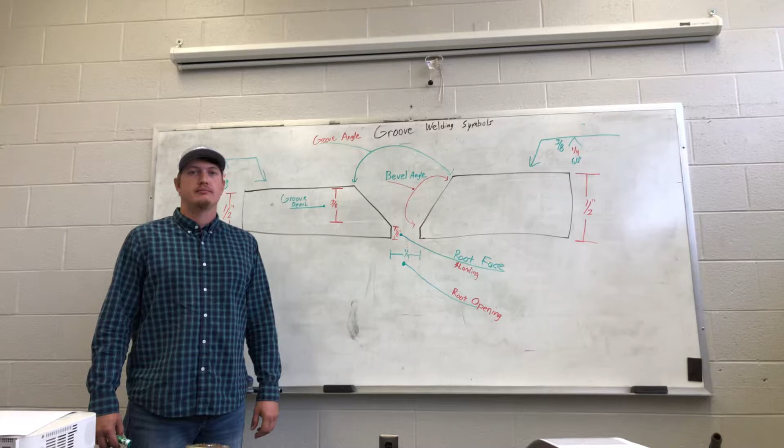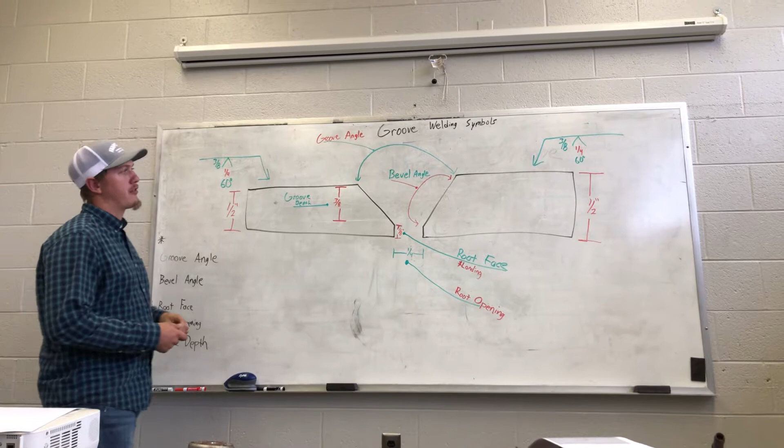What's up, guys? Today we're talking about groove welds and some of the different things we might see on a groove welding symbol. So we're going to jump right in. We've got several different things we want to cover. First off, check out our weld symbol up here.

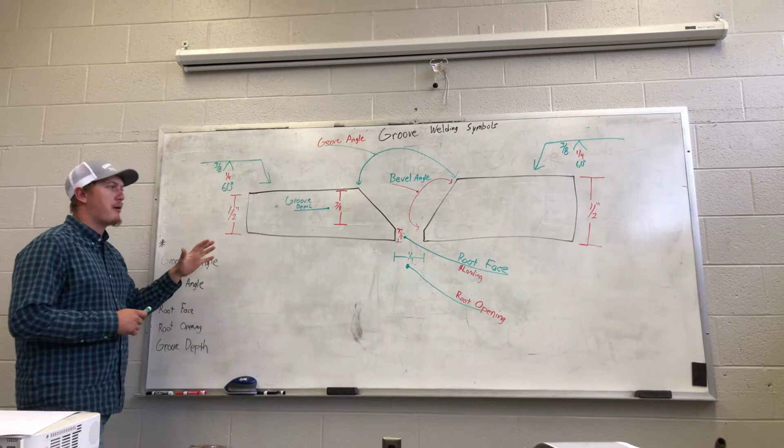We have a V groove, and we got the actual material drawn up here. Got a lot of different measurements on it. We're going to talk about these different measurements and what it means on the symbol.

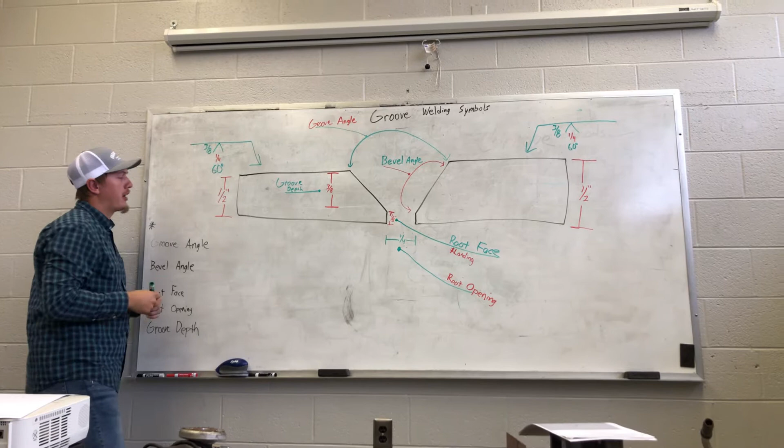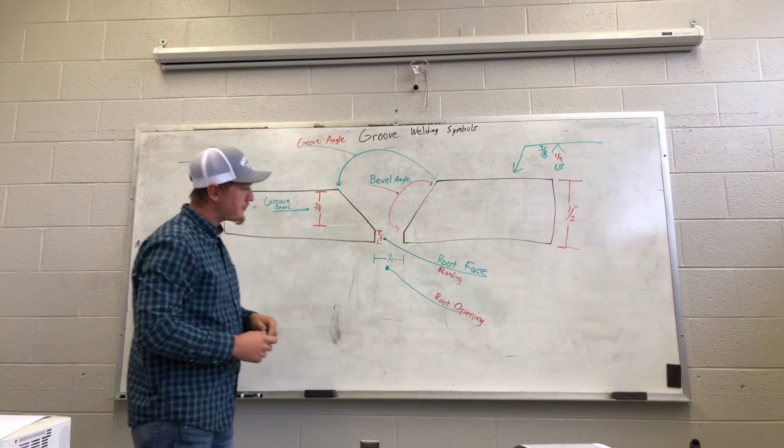First off, we got the V groove symbol, and we see a quarter directly under that. That quarter is going to stand for the root opening. The root opening is the distance between this parent material and this parent material. It's how far apart we're going to space those before we weld them. This particular one is called for 1/4 inch. That's our root opening, got to remember that. It'll always be directly below the groove weld symbol.

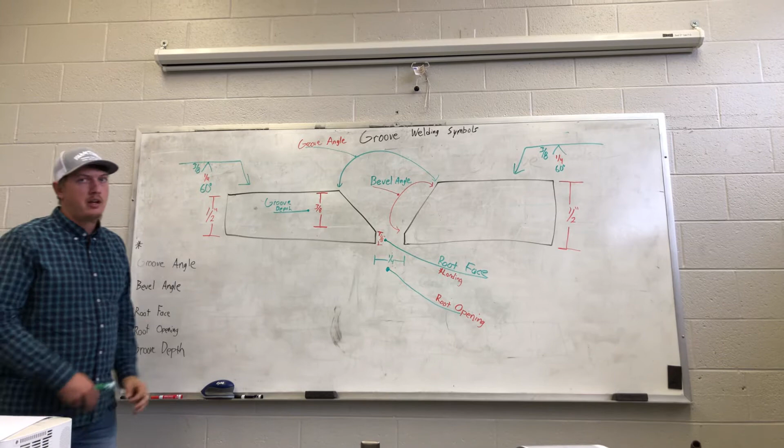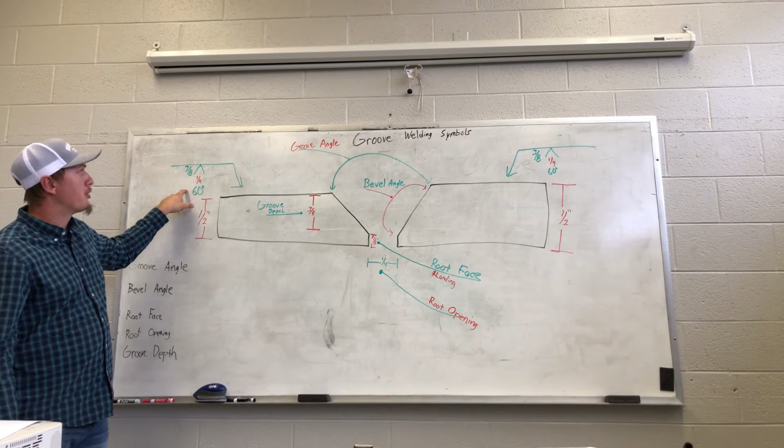Next, we have a degree. It says 60 degrees. So when we talk about groove welds, there's two different angles. We have the groove angle and a bevel angle. So the degree we have on here is wanting us to put a groove angle of 60 degrees. Groove angle is from this parent material all the way over to this parent material.

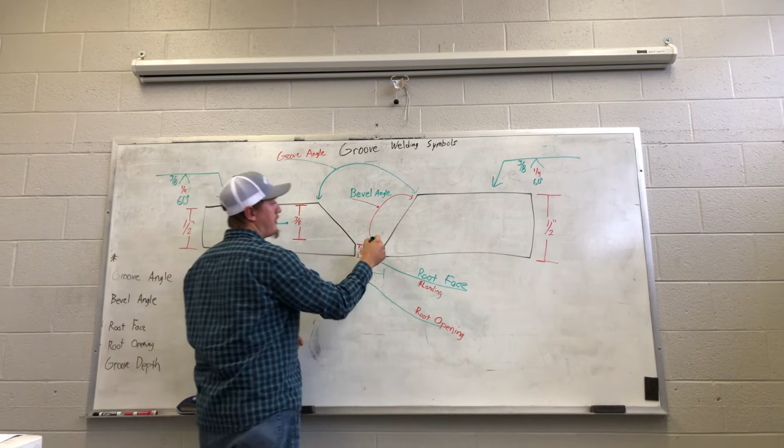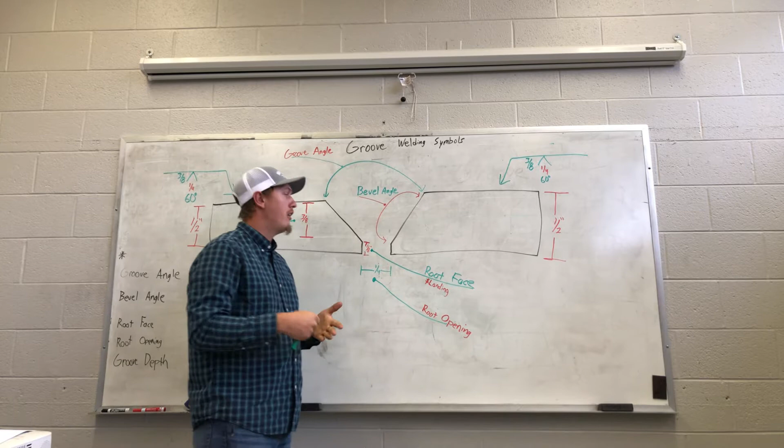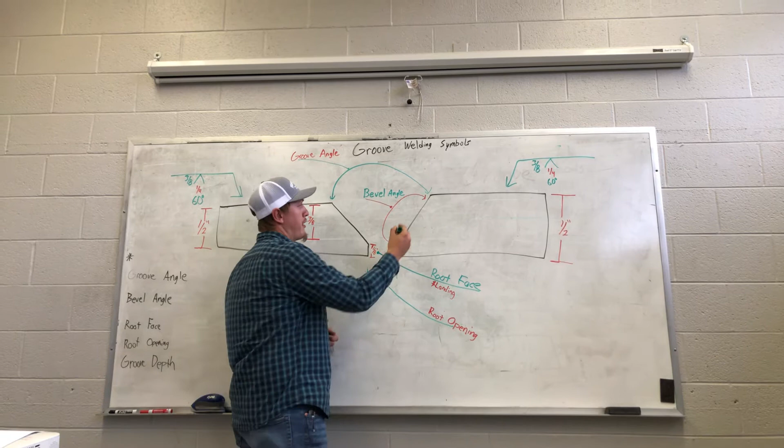And the way we get that is determined by the bevel angle. We just double whatever our bevel angle is. So whenever we prepare this material, either we beveled it with a grinder, a file, cutting torch, plasma torch, machine, whatever we did to put that bevel angle on there, that degree, which this particular one would be 30 degrees. This bevel at 30-degree angle. This one's also 30 degrees, they're the same.

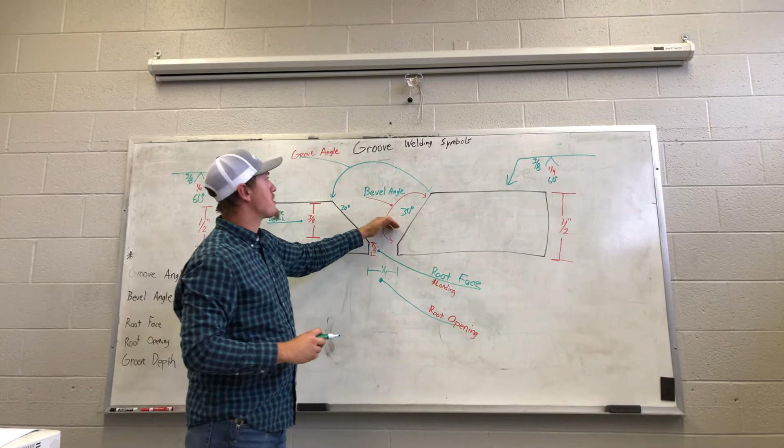When we add both of our bevel angles together, that gives us the groove angle. So it's going to ask you to do a little bit of math in your head as a welder. This is always a groove angle, so it's going to show us the groove angle. We're going to have to divide that by 2 to put it up there.

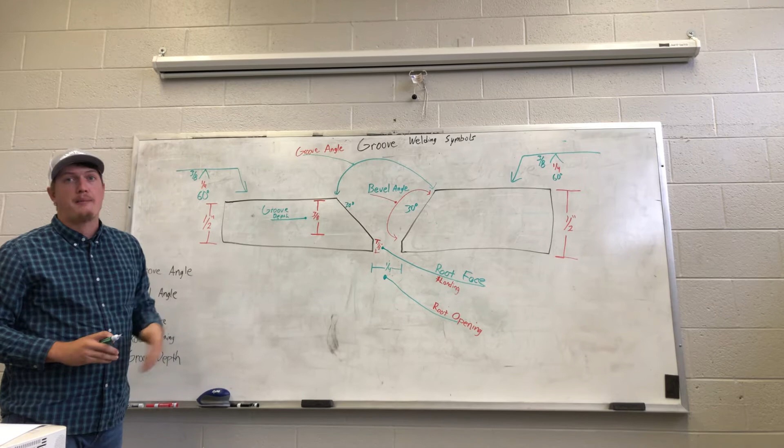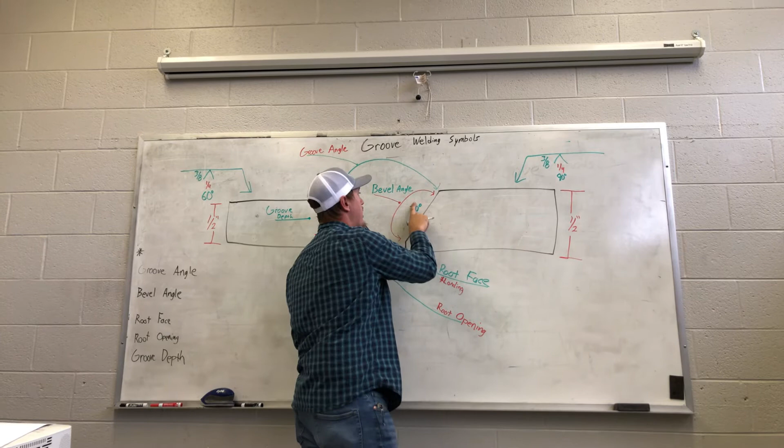For example, if we had one that said 90 degrees, so we use this one over here, it said 90 degrees, these bevel angles actually be 45, not 30, right? We just divided 90 in half. So that's a good example of that. So we need to know the difference between a bevel angle and a groove angle. The actual symbol is always going to have the groove angle on it.

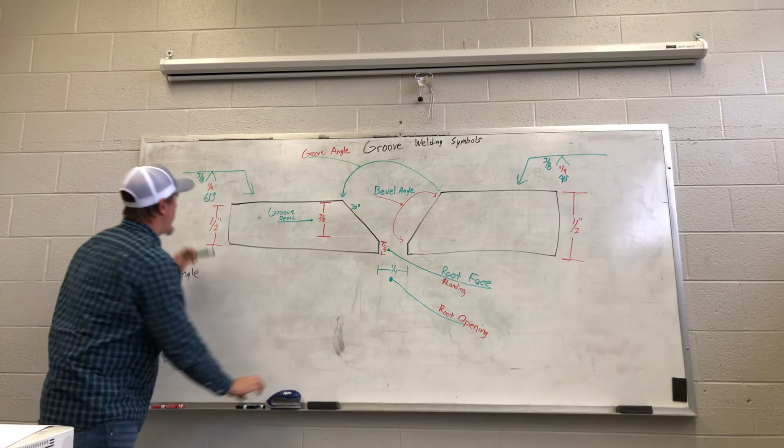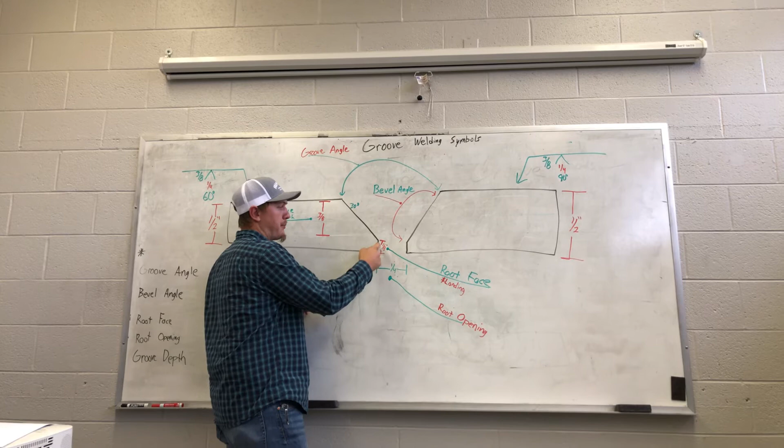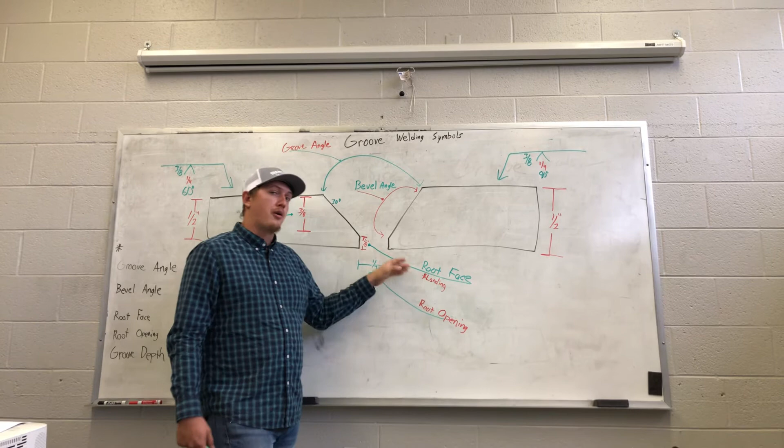Next, we'll talk about the root face. So the root face, this particular plate has a preparation here where they smoothed off that sharp edge where it used to come out sharp. Again, this could have been done with a file, the grinder, doesn't matter what we've done it with. A lot of times as welders we call this the landing, but the technical AWS term for it is root face. This particular root face is an 1/8 inch thick, 1/8 inch measurement.

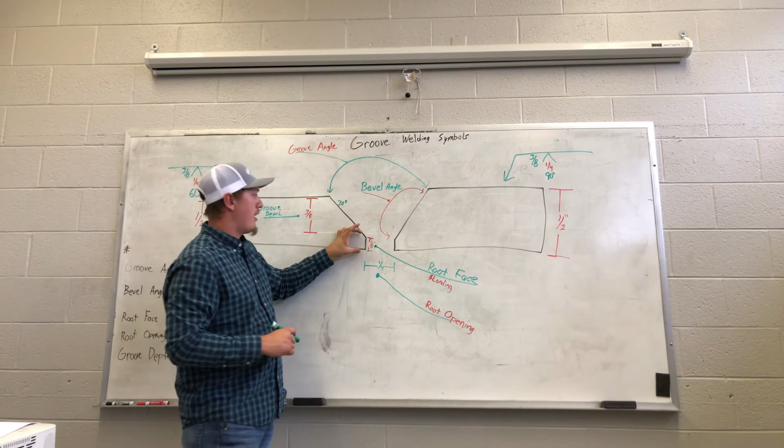And that's how long that's going to be or how wide it's going to be, however you want to look at that. We have the overall material thickness here, which is 1/2 inch. So it has some 1/2 inch plates that were beveled.

So now we're going to talk about groove depth. Groove depth will show up on your weld symbol. This particular one has got 3/8 groove depth. So we're going to put all those numbers together to get that. We're going to have to do a little bit of math.

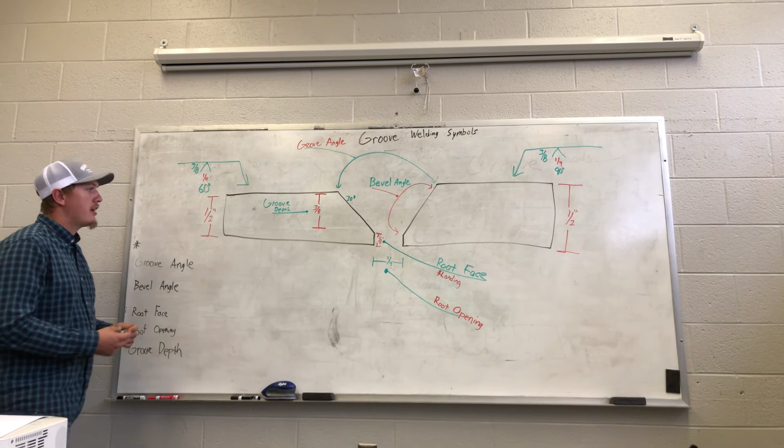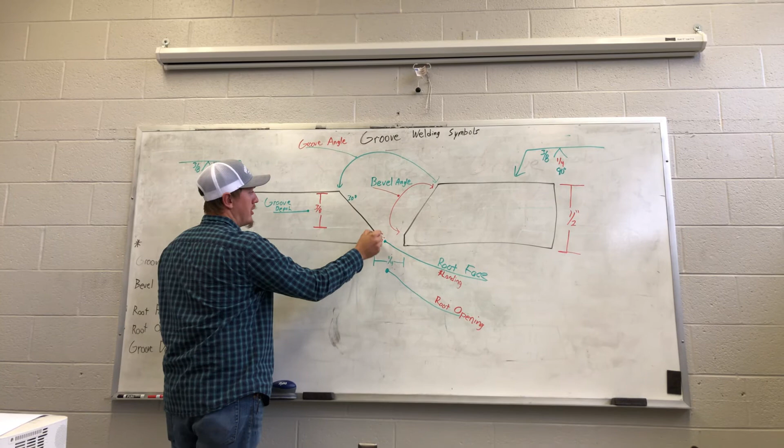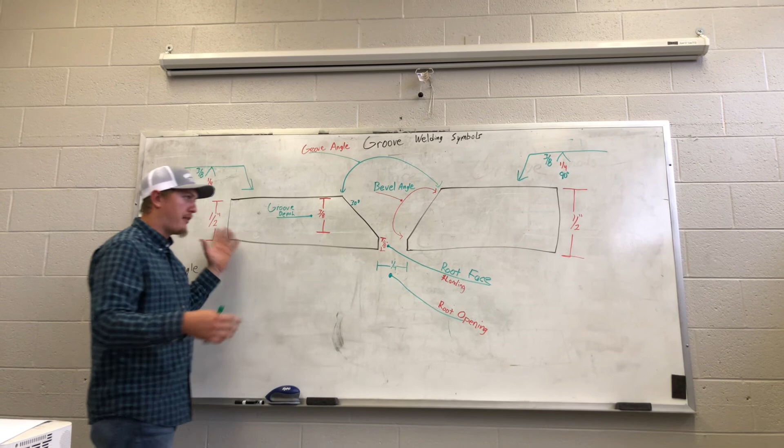So if it tells us that our groove depth is 3/8 of an inch, which it did, it's always to the left of that symbol, the groove welding symbol, and we had a 1/2 inch thick plate, we knew that we had to leave some type of preparation here because it wasn't a total 1/2 inch. But we had to do a little bit of math and say 1/2 inch minus 3/8 of an inch equals 1/8 of an inch. And again, we can have all kinds of different numbers there. That's just a particular one for this.

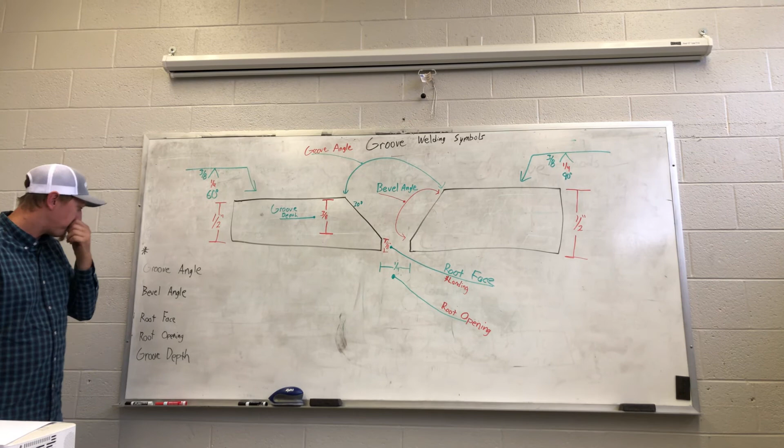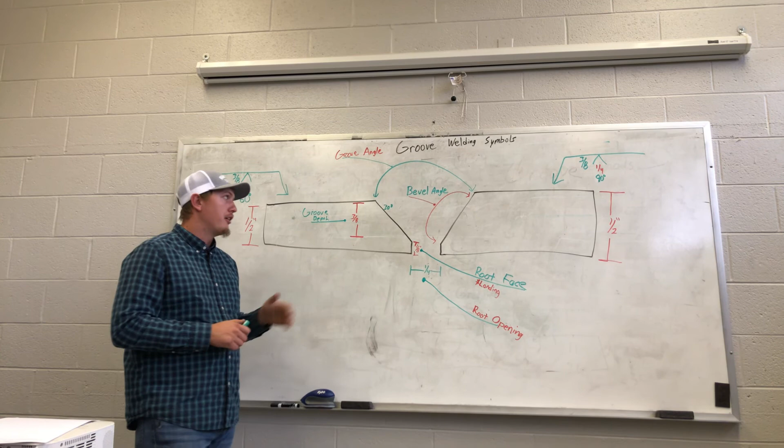So groove depth, groove weld symbol, root opening, groove angle. So we got to know those different things, and hopefully this will give you a visual representation of what that stuff should look like. You're going to have some math going on whenever you're doing groove welds. It's not going to give you everything, it's going to give you part of the stuff, and we're going to have to kind of plug in some numbers to solve that as welders.

So we know how to prepare our material and how to weld that material. And that's it for all the different angles and things that go into a groove weld symbol.